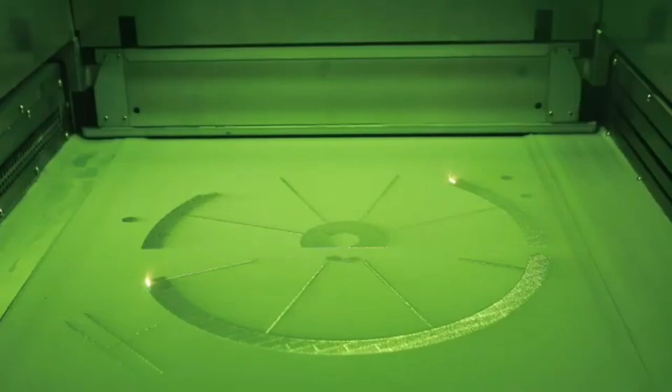This creates an important question: how can we predict how these printed parts will perform without using expensive trial and error testing?

As finite element analysis software improves, we can now model 3D printed parts with much more detail. But a simulation is only valuable if it matches actual experimental outcomes. That is why it is important to understand how accurate these models are and how infill affects the strength and behavior of the printed parts.

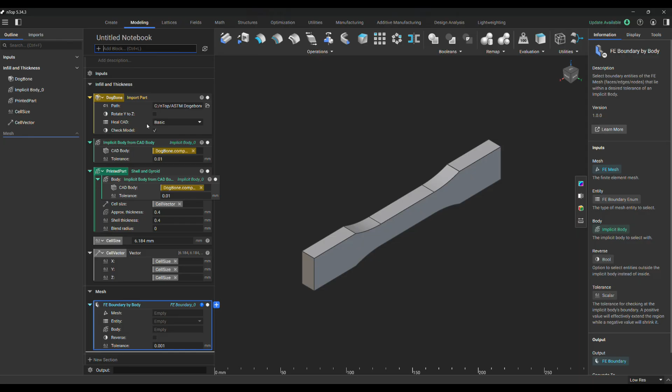The final deliverable for our project is a document of recommendations and procedures that explains how to produce, repeat, and verify FDM models in finite element analysis. Our goal is to help future teams create more reliable simulations and reduce the need for unnecessary testing.

Cummings Aerospace has commissioned our design team to provide a system to predict the material properties of 3D printed products. Our project addresses real engineering needs by integrating simulation with additive manufacturing, generating recommendations for optimized strength-to-weight performance.

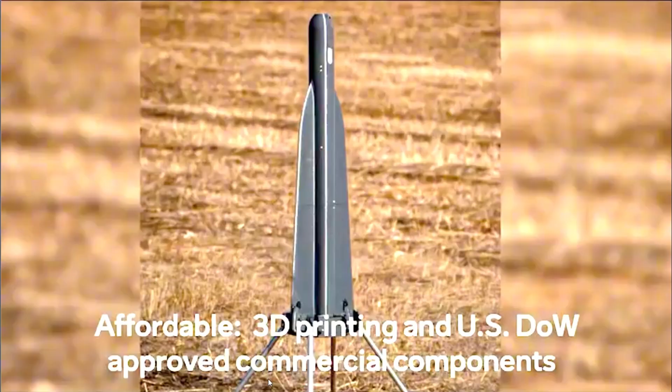The Hellhound S2 and S3 platforms shown here are Cummings Aerospace's 3D printed, jet-powered unmanned aerial systems. Their lightweight design relies on efficient internal structures to maintain stability and withstand dynamic flight loads.

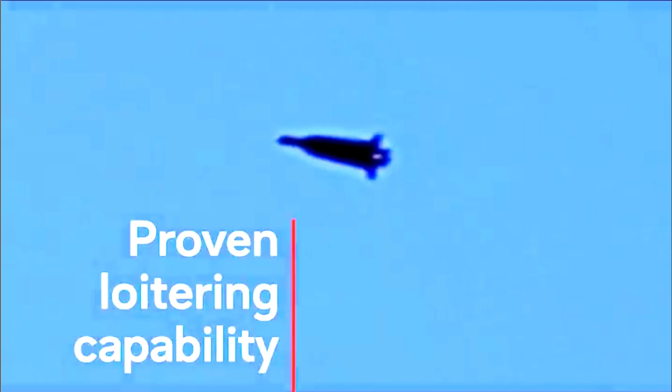Our strength-to-weight optimization method applies directly to similar components. Even small weight reductions enhance range, loiter time, and payload capacity.

By using PETG and FDM printing, we enable cost-effective, material-efficient fabrication for prototype hardware and low-expense UAS components. This approach reduces waste, extends machine life, and supports data-driven design for systems like the Hellhound.

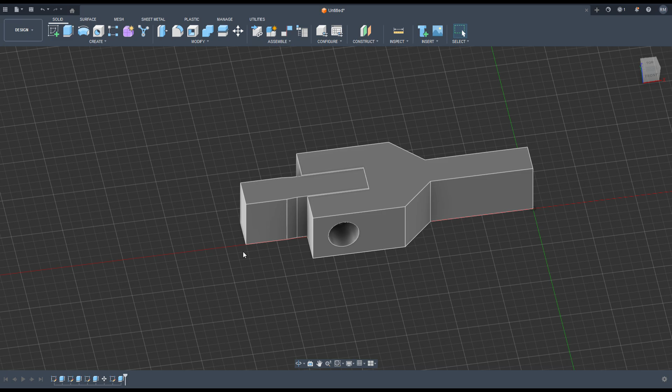Our approach combines simulation, prototyping, and experimental testing. We begin by researching different testing variables and decide on focusing how different infill patterns and densities affect part strength.

To validate our models, we designed test samples and 3D printed them using FDM printers with a material called PETG. Each sample was printed with a controlled internal structure and consistent process parameters.

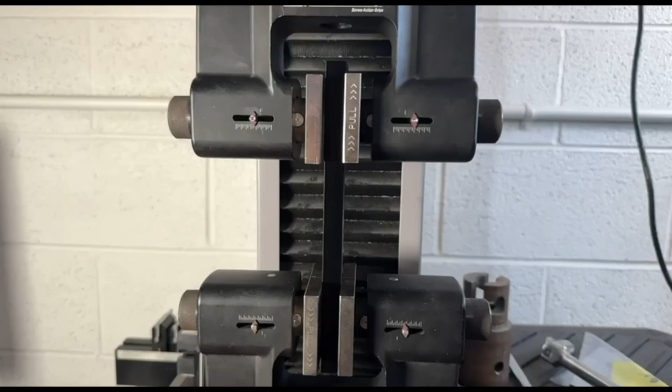We are currently performing five types of mechanical testing: impact, tensile, shear, permeation, and finally bending. These tests provide a comprehensive understanding of material behavior under different loading conditions and infill percentages.

Tensile properties and Young's modulus were measured to understand how the material stretches, how stiff it is, and when it starts to fail under pulling force.

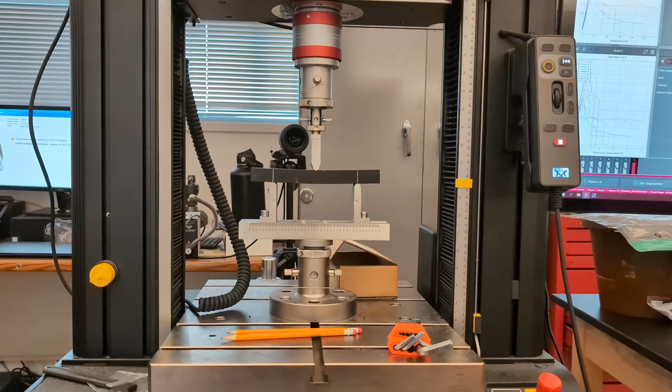The goal of the shear test was to measure how much sliding force the material can handle before it breaks. The bending test was evaluated to learn how the samples behave under flexing loads and how much they can bend before failure.

Water absorption was tested to understand how much moisture the PETG material absorbs over time and how this affects its performance.

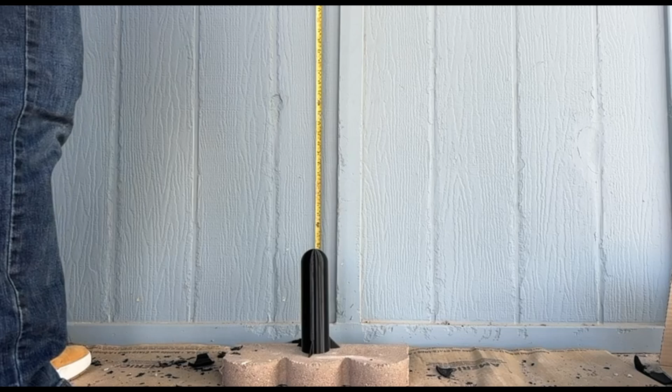The goal of the impact test was to determine how well the material absorbs sudden shocks or hits, and how the infill affects toughness.

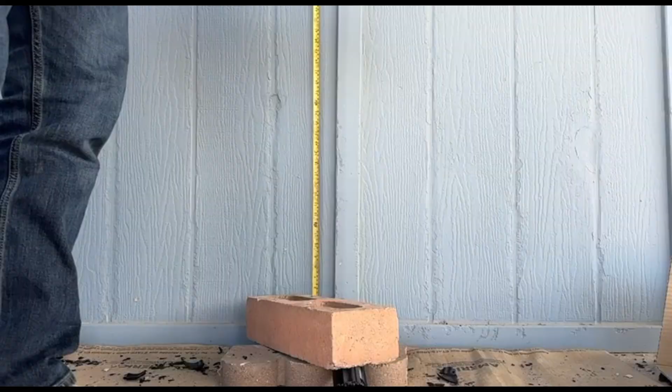For our safety, our goals were to reduce risk, ensure proper machine operation, and protect the team. We completed safety training, used protective glasses, and followed machine operation procedures during printing and testing.

Our project design centers around the development of structural analysis methodology.

This is an iterative design that integrates digital simulation, design optimization, validation of test parts, and experimental testing to evaluate the performance of 3D printed PETG components. This design is a repeatable analytical process that aerospace engineers can apply to any 3D printed component to optimize for strength-to-weight ratio, reliability, and efficiency.

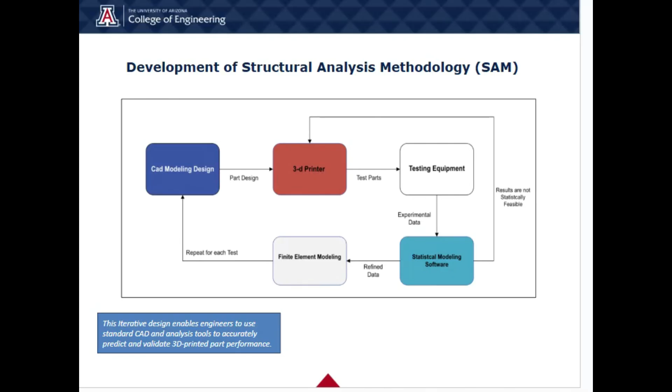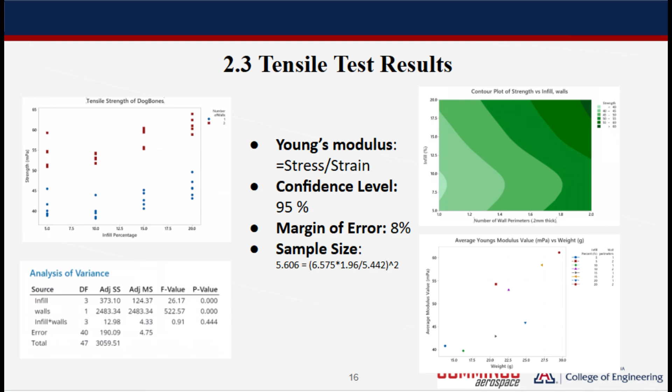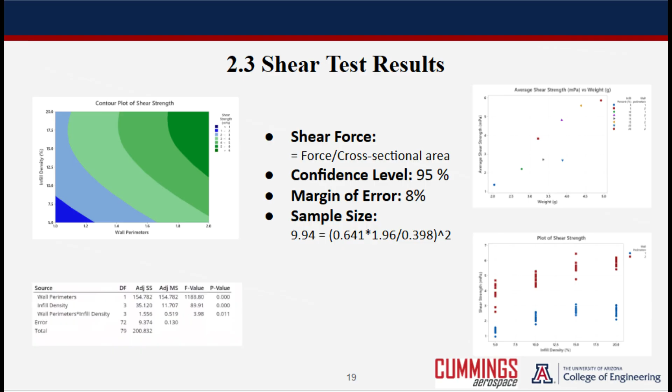Prioritizing the sponsor needs influenced the tests used and variables tested. After collecting experimental data, the mean, variation, and confidence intervals were calculated for each test. A two-way ANOVA test was then applied to see if there was any correlation between the experimental factors. For tests that showed a significant correlation, a Tukey multiple comparison test was used to figure out which factors affected the results the most. A regression equation was formulated to characterize the effects of different factors to prioritize them.

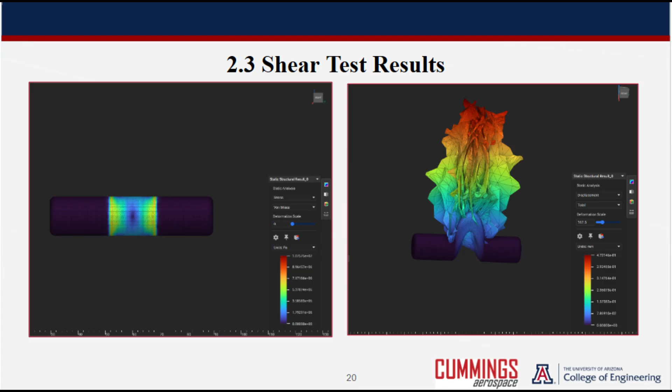FEA models were made for each test part and compared to the experimental results to help create optimized strength to weight ratios. Due to modern FEA software progressively becoming more advanced, the need to understand how closely the models match real-world behavior has become increasingly important.

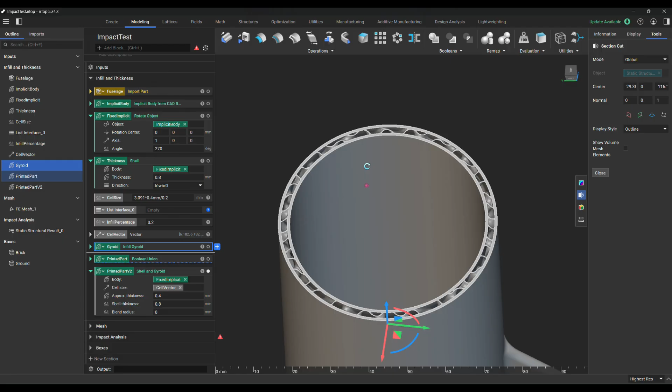The system was designed to use industry standards for testing, software, and simulation so it can be utilized with ease by Cummings Aerospace. The ability to verify the FEA models with experimental results allows the user to attain material property standards and verify structurally weak points to optimize reinforced areas for increased strength to weight ratios.

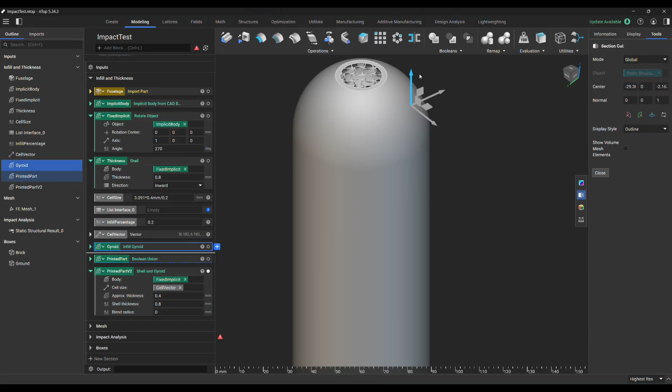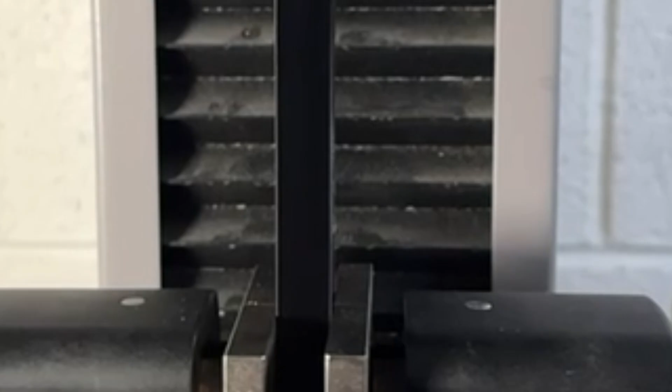The performance of our design was guided by the system requirements that were formulated from the needs of our sponsor and the overall goal for the project. Several key requirements included that the process must be repeatable and efficient for engineers to follow so it can easily be integrated into Cummings Aerospace.

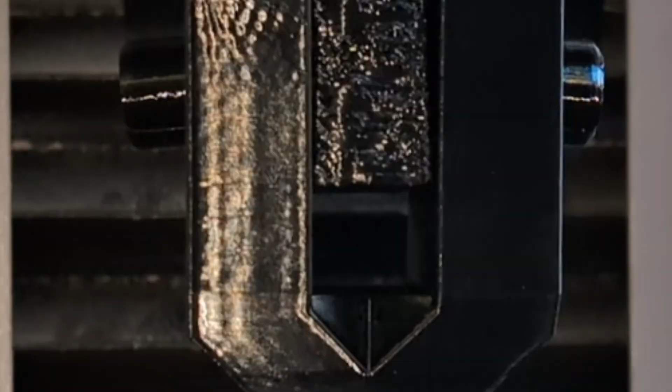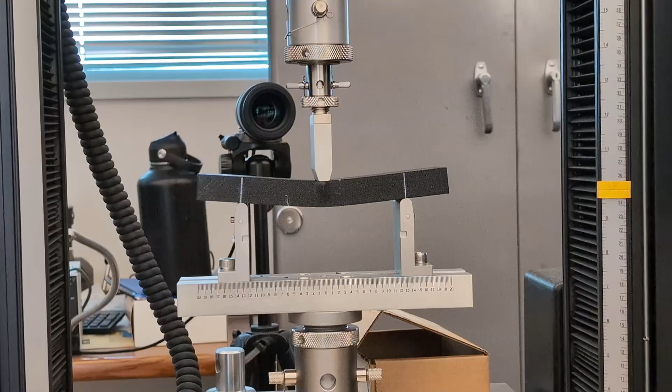The system must also use CAD software like SolidWorks for modeling and then FEA software like ANSYS and nTop for structural analysis. A strength to weight recommendation is also set to be put forth, outlined by the experimentation and modeling. As a team, all of these goals were accomplished with all requirements tracked and verified with a system verification matrix.

How good are our results? Our sponsor wanted results with a 90% confidence interval and a 10% margin of error. We were able to exceed these expectations with a 95% confidence interval and 8% margin of error. By doing multiple rounds of testing, sample sizes could be chosen that satisfy our accuracy requirement. For this project, all of the quantitative data was collected with an 8% margin of error.

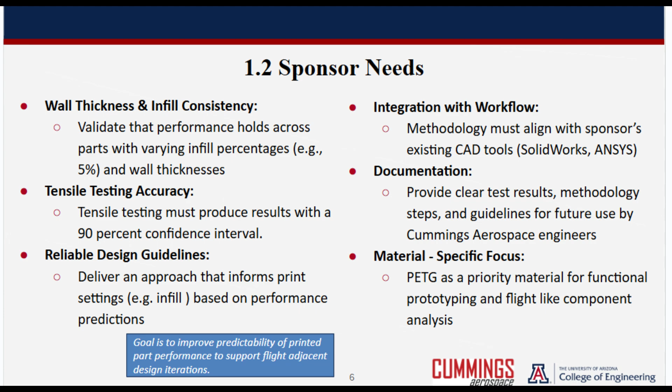Our first test result shows that simulation matches the real world tests. During testing, we noticed that for all samples and all conditions, the infill percentage has a direct relationship with the Young's modulus. This means when you increase the infill and make the part more solid, the material became less elastic and more stiff. This helped designers choose what matters more for their part, flexibility or stiffness, making the material useful for many different applications.